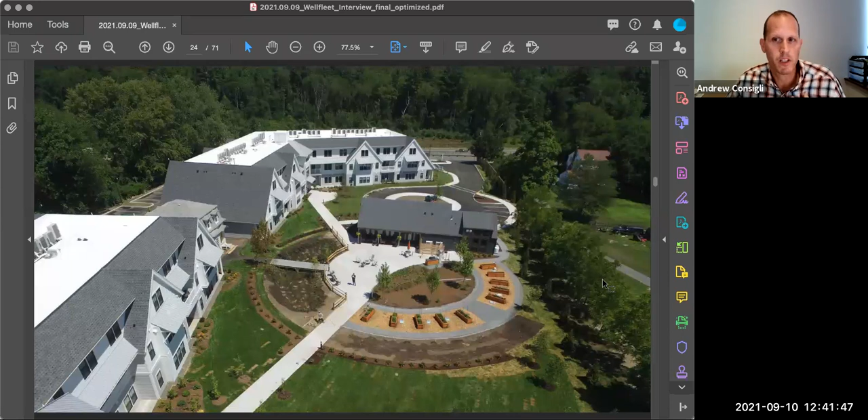The focal point is the community vegetable garden in the center, where residents can garden and socialize outdoors, a community house where they can socialize indoors, and a relocated original farmhouse that was on the property, repurposed and renovated as a garden shed to be used in conjunction with the vegetable gardens.

Other sustainable design techniques include a rain garden that collects all the rainwater for site irrigation, and solar panels that will soon be installed to run all the electric in the buildings.

Our last project, although a different scale and more urban than our previous projects, Ace Flats was just completed this past summer and is now being leased in the town of Reading, Massachusetts. This 4-story project is a mixed income, mixed use, transit-oriented development in a newly created 40R smart growth district.

The project received $1.4 million in DHCD funding in the first round and has been praised by the planning board and other leaders in the town for its contextual design.

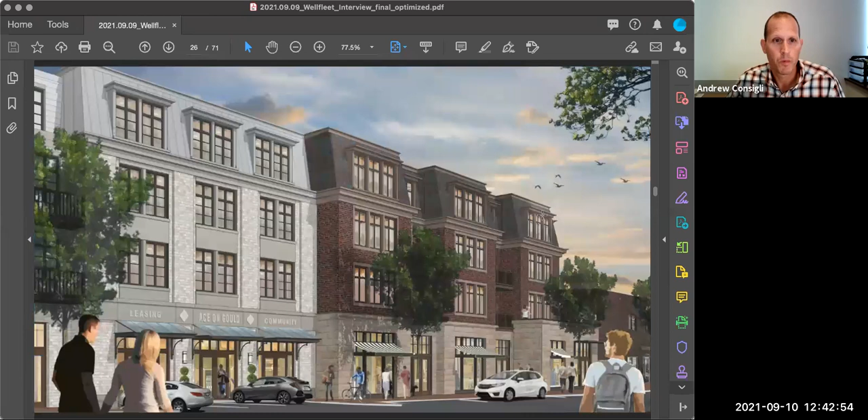This project was a joint venture with Trevorth Companies out of Boston, where both firms worked equally to co-develop Ace Flats. Trevorth Companies and Civico, because of the success of this project, are now working on a LIHTC project that is very similar to Ace Flats in downtown Winchester.

As I hope you can tell from our project experience, we have a broad range of project types, all focused on multifamily housing. There are common threads that weave throughout each project, such as design and site planning principles, sustainability, and collaboration with public, private, and nonprofit partners.

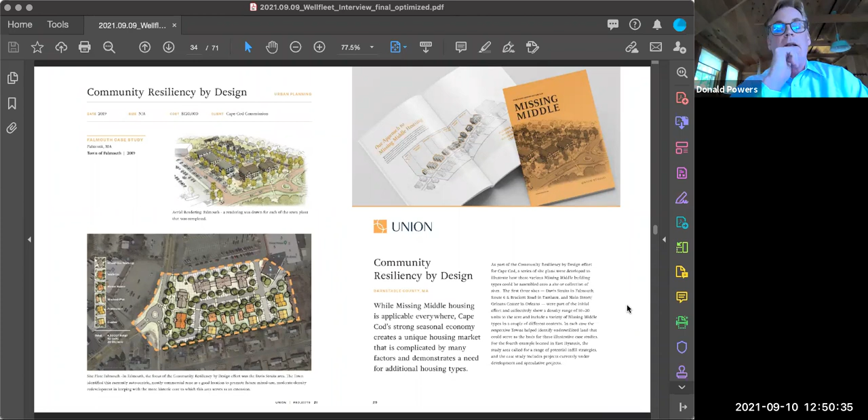For this project, Community Resiliency by Design, the Cape Cod Commission commissioned us to originally look at 3 communities as model communities experiencing growth issues, and to develop strategies to accommodate that growth in a density that was sympathetic. All density is not the same—design is the key factor in whether density is offensive to the community or extends it.

We examined a number of different possibilities. The communities we worked in were Falmouth, Orleans, and Eastham originally, and later we added Hyannis and Sandwich. The primary point is that the Cape Cod Commission believes we're one of the good guys—a mission-based firm focused on solving these community problems since our inception 21 years ago, and we treat it as our civic mission to solve exactly the problem Wellfleet is grappling with right now.

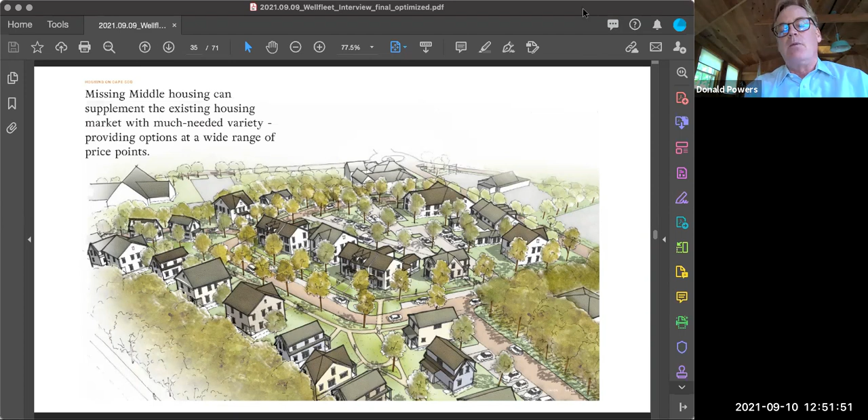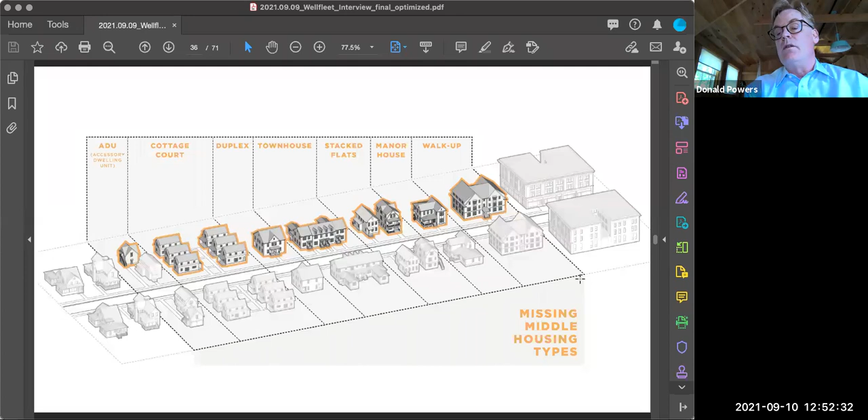Next slide, please. So just to define what missing middle is—it's really the stuff between the left-hand little cottage and the right-hand apartment building. It's all those forms of housing that existed in our communities until about 1940, when they started to be zoned out of existence and torn down and replaced with single-family houses. Not all the forms represented here will be appropriate for Wellfleet, but they represent a menu of options that play well in a mixed environment, with the single-family fabric you have, and in certain communities where larger forms are appropriate as well. Next slide, please.

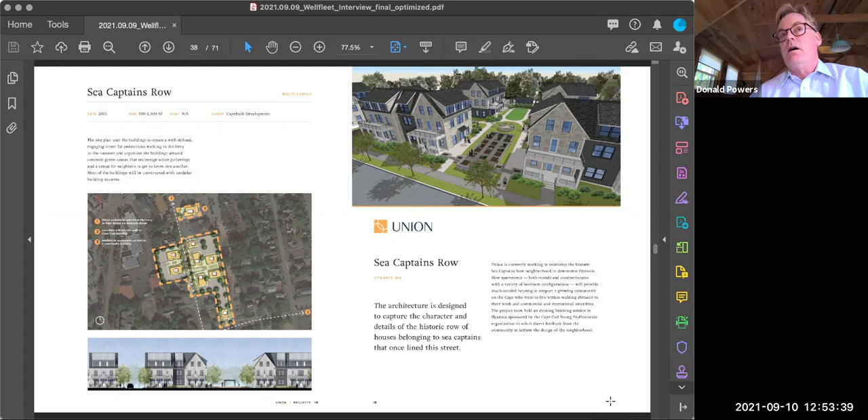At the other end of the spectrum, this is an example we'd relate to our project called the Manor House. These are bigger than what we're proposing at Wellfleet, but it's another example where you can take a multifamily structure and render it in pieces sympathetic to, or derived from, the scale of a single family neighborhood. This is currently under construction in Hyannis right now.

The summary of this series of slides is that this has been 21 years of honing our skill in how you make an appropriate scale for a neighborhood. That neighborhood is always different - it's never the same type or combination of types. For instance, this one in Brewster, Mass was a single family neighborhood with no mix of types, but again the scale and density create something, if not altogether traditional, certainly pleasing and recognizable to someone who understands those kinds of neighborhoods.

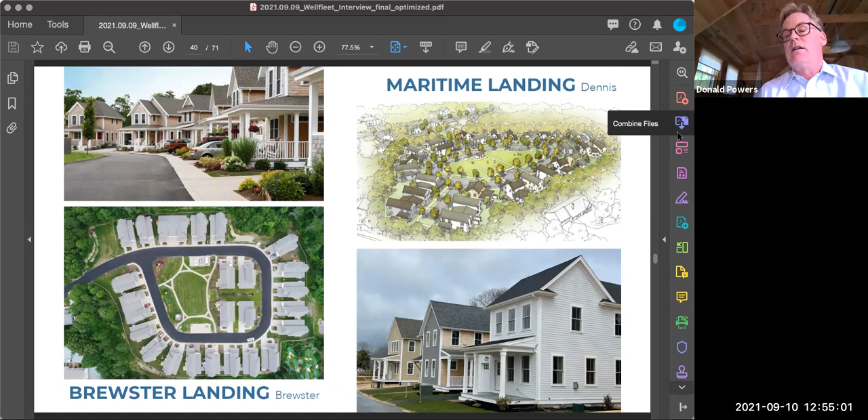So just to reiterate, this has been our passion. We really don't make the distinction between affordable housing and market rate housing - it's all the same design problem. How do you fit into a neighborhood, and how do you do that in a way that extends the fabric of the neighborhood rather than creating a rupture?

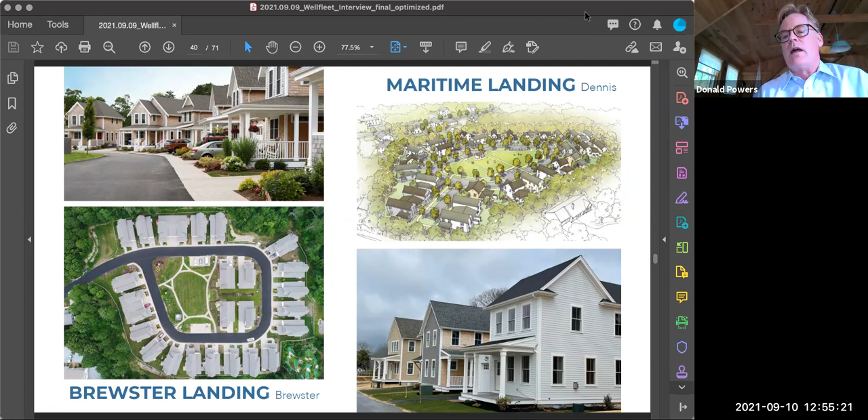So with that, I'll pitch it back to Taylor, who's now going to hand it over to Jeremy Lake, a senior associate in our firm, who's going to talk specifically about our proposal and how these principles of site design and the missing middle find their way into our proposal.

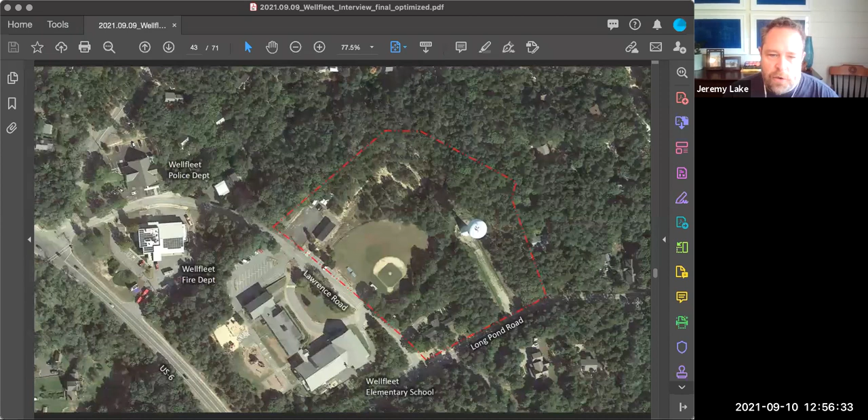We think that's a more sympathetic way of addressing the need here at 95 Lawrence, whereas you can see there's a lot of single family at lower density in the surrounding context. This is the existing site that you're well aware of. Go ahead to the next one, Taylor.

What we did was a series of analytical diagrams to walk you through our thought process, what we were thinking about and seeing as we came up with the proposed site plan. First and foremost, the existing ball field - we had some initial conversations on our team about whether it would make more sense to shift the ball field one way or the other, so the community could be more consolidated on half the site, with the baseball field on the other.

But in addition to the cost associated with that, the more we talked about it, we realized the baseball field is actually kind of a really cool potential focal feature for the entire community, and it made a lot of sense in terms of its relation to the elementary school across the street, which is the primary user of it. So in the end, we decided it makes a lot of sense to actually keep the existing ball field where it is.

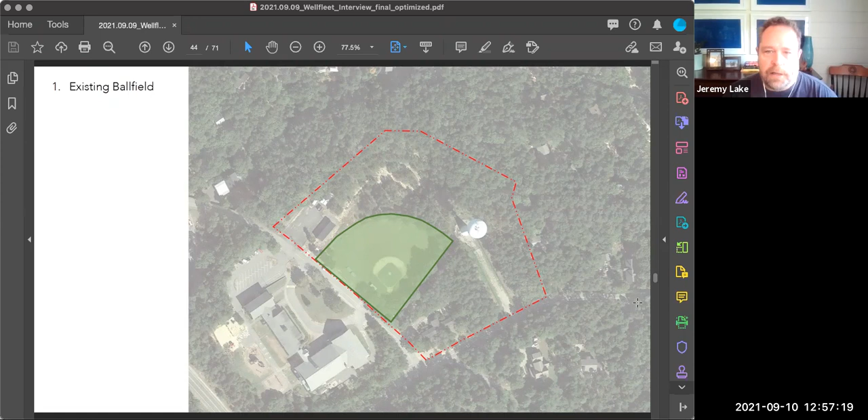We also realized it provided an opportunity, and I know Bohler had done a number of studies about this with the town, but just thinking about how we might approach the wastewater treatment need, both for this site and the adjacent structures that are part of this discussion. Certainly, utilizing the outfield of the ball field as part of the leaching field area for the wastewater treatment site made a lot of sense.

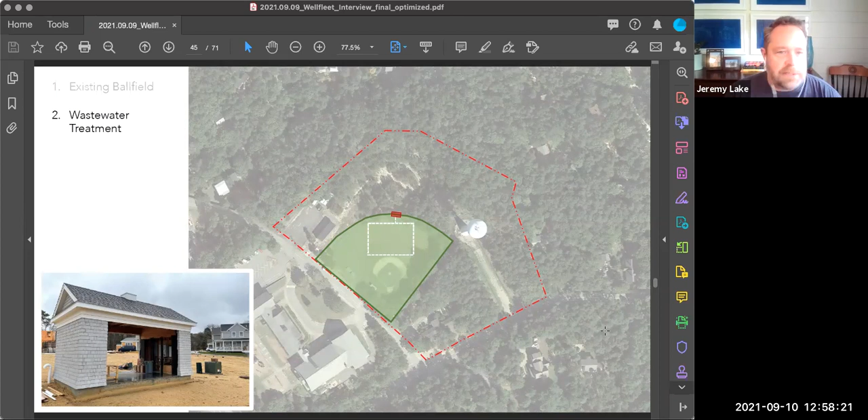We also started thinking through a little bit what we might do with some of the more utilitarian needs. Where do the pumps and the things go, in some sort of structure? In the lower left hand, we're showing an image of a structure we've included at Maritime Landing in Dennis, where half of that building houses some of the required mechanical equipment. But we've also combined it with our mail kiosks. So the idea was that through sort of thoughtful and intentional design, even utilitarian needs can help in terms of placemaking and character building, and we were able to make a sort of communal amenity out of something that's somewhat utilitarian. We'd like to try to do something similar here. Obviously, a lot of details to be worked out as to whether or not that's the most feasible approach, but conceptually, that's what we'd like to try doing.

Certainly, the existing water tank needed to be addressed. That's not going anywhere. And affiliated with that is the easement that delivers the water to and from that tank, which obviously needs to stay in place as well. So those were sort of the fixed items in the site.

So when we were thinking about the site access, we appreciated that it made the most sense to imagine coming and going primarily from Lawrence Road, trying to avoid Long Pond Road there along the south, because that ties in primarily to the single family community. So what we wanted to create was this internal loop that basically circles around the field and through that easement and back down again to Lawrence Road, just to provide a multitude of ways in and out of the community. That's also really great for emergency access and other access needs for a wider range of users, including access to the water tank.

One of the conversations we had with folks on the site during the site visit was whether or not the existing drive up to the water tank was sacred. Was that something that needed to be kept and respected? Was there a lot of infrastructure embedded in there? And the answer we got in the field was that no, as long as their service vehicles could drive right up to the water tank and do what they need to do, it didn't necessarily have to be along that route. So one of the things we were proposing was thinking of our own internal site access also as access to the water tank, also emergency access, trash—all those things utilize those spaces.

We also wanted to include a central green space that was about midway around that loop, and recognized that was also a good way of accommodating and incorporating the water tank. So we included a central green space at that location, and also included basically a little secondary loop that would go out and around that central green space, tying back to our main access loop.

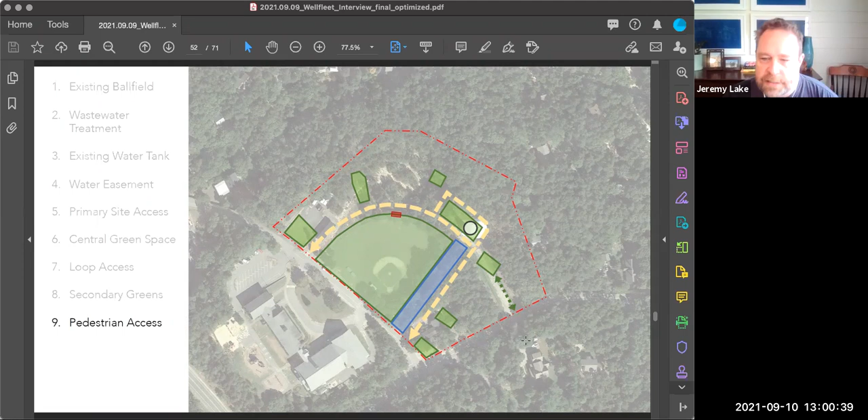Down in the lower right-hand corner where we already have the drive for the water tank service, we thought it would be nice to include pedestrian access out that way, so residents wanting to take advantage of a walk or a run along Long Pond Road could still get out there, since that clearing already exists through the trees.

The primary feature of our design is this notion of distributing the buildings. We've been building up to that with everything we've talked about so far, thinking of this as a village, a neighborhood, not a single large format structure, because we think that is the most appropriate way of accommodating a lot of density on site, in forms that should be sympathetic and recognizable to the existing single family context.

Associated with that is also distributed parking. Instead of needing one or two large consolidated lots, the parking for the individual units can be distributed with the units themselves. Most of that parking can actually be accommodated on the primary site access and the secondary loop. We only needed one small consolidated parking spot, top middle, where we had a few buildings back off of that primary loop, so we can accommodate the required parking in a way that feels broken up so it doesn't overwhelm.

And last but not least, by trying to keep the development as far west as we could, we tried to provide as much of a buffer as possible along Long Pond Road, recognizing those are primarily single family homes along Long Pond, wanting to address that to the degree we could along that edge.

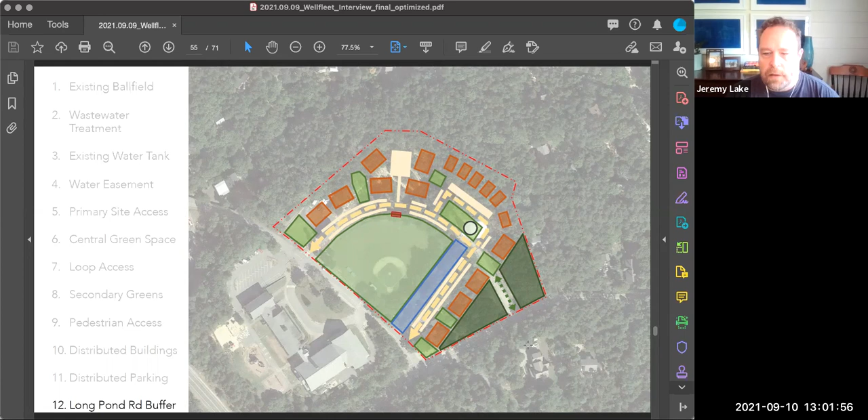So this is the resulting proposal when you take all those things into consideration. You can see the drive as it works its way out and around the ball field. That's a 20-foot wide two-way lane that also should serve fire access needs and all the other access needs.

You can see the idea is that the homes are arrayed along that loop road. We think it's actually kind of cool thinking about residents being able to look out and see a little league baseball game going on, with units out beyond the outfield wall, reinforcing the form of the field. So really thinking of that as a communal asset, strengthening the ties between this neighborhood and the broader community.

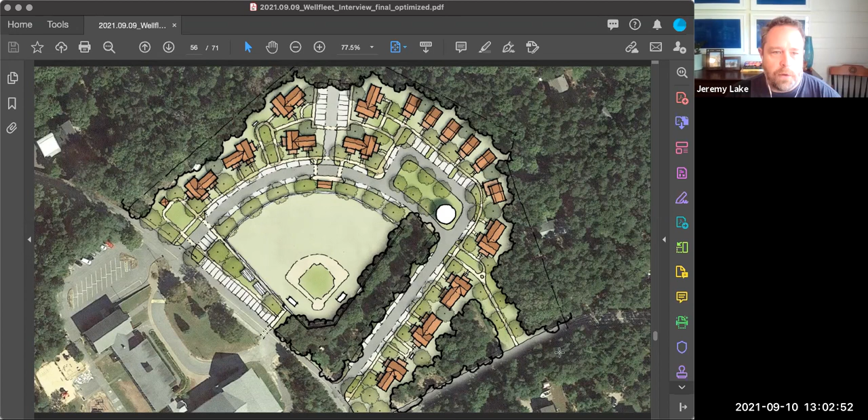This also shows the distributed green spaces. One thing we didn't highlight in the diagram is that there are walks, sidewalks, and trails that connect all of these things together, so residents have ample ways of getting around and connecting out to the broader community and to one another within the community. With that, I'll pass it back to Don to talk you through the units themselves.

Thanks, Jeremy. The first thing I would say, and it's a fairly obvious point, is that we would take our inspiration from the architecture of Wellfleet and the Greater Cape and Islands. There's a very strong established tradition of shingled cottages in the Outer Cape and the islands, and we're looking at those for clues on how to organize the buildings, how to organize the site, how to define edges, and what scale is appropriate. These were some of our inspiration images, and each of the items, the roses, the fences, the ribbon walks, and the massing of the buildings will show up in our proposed architecture.

Next slide, please. So for our architecture, Jeremy pointed out that the manor houses, each of which essentially has a footprint no larger than a single family house. But even beyond that, we've taken the strategy of dividing that form into a series of what we're calling connected cottages.

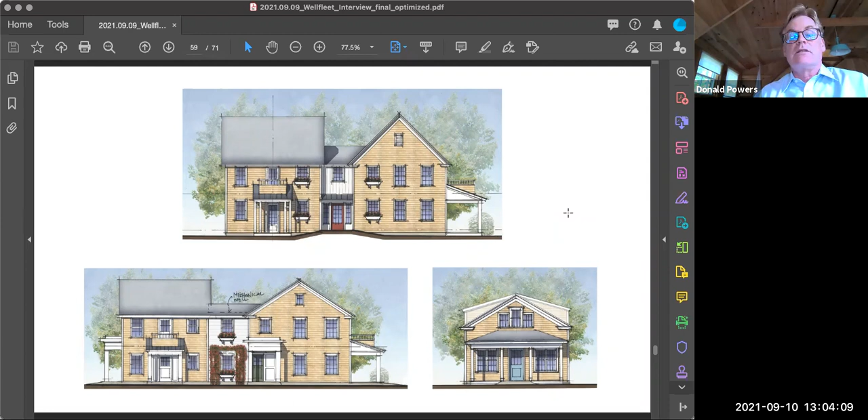Next slide, please. So you can see this overall form is about 50 feet by 25 feet, which is the size of a normal single family house. But next slide please, in fact that's composed of things which are much more the scale of a 19th century Cape cottage, which would mean each block is something more like 24 by 24, and then there's a hyphen where that needs to be connected.

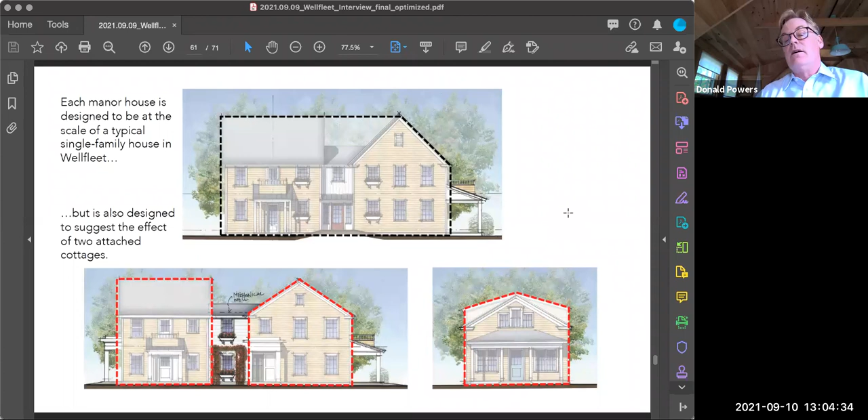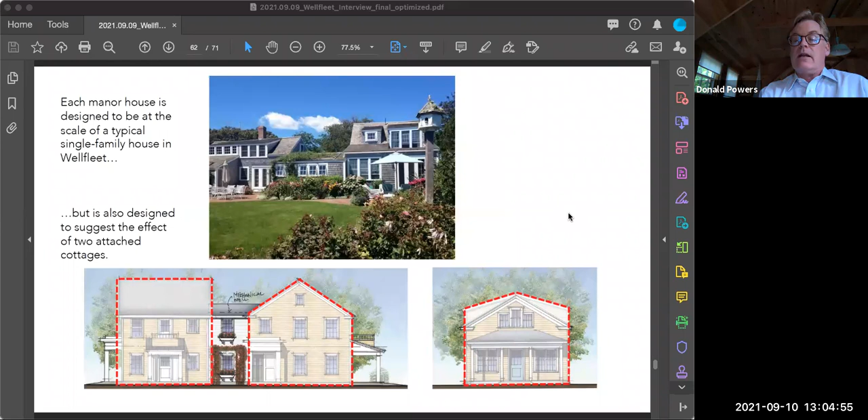So what you're looking at are the four-unit buildings, the strategy of taking this four-unit building where there are two flats on the right and two flats on the left, connected by this hyphen. You can see the direct lineage coming off of the precedents that we're looking at. It's a way of reducing that scale, taking a four-unit building and making it the scale of a single unit building, then taking a single unit building and making that the scale of two connected cottages.

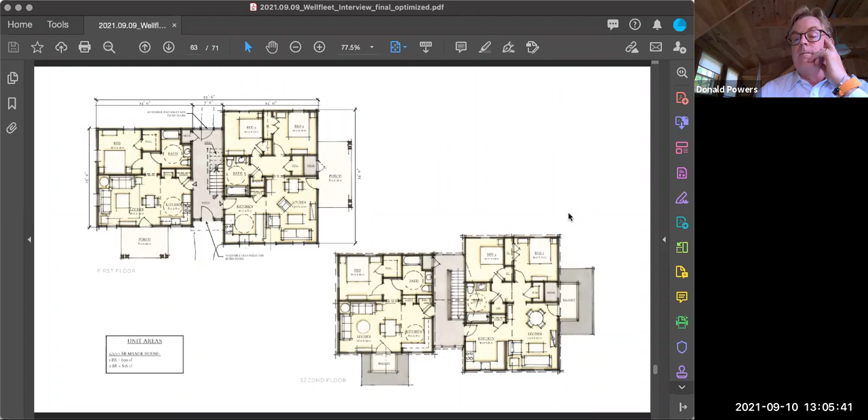There were comments in the questions about the size of the units. One thing we took as our guideline, without being absolutely certain of all the criteria to which we would be held, we designed to the DHCD design guidelines for unit size, which are very clear in terms of the maximum size for units and what features need to be included. We did that as our most conservative approach. Certainly as the project develops, there might be opportunities to develop slightly larger units with more storage or other amenities that collectively as a team we all agree are needed, but in this case we've hewn pretty closely to the DHCD design guidelines.

Next slide, please. The set of materials is ubiquitous to the Cape: white cedar shingles, white trim, divided light windows, and board and batten occasionally. Next slide, please.

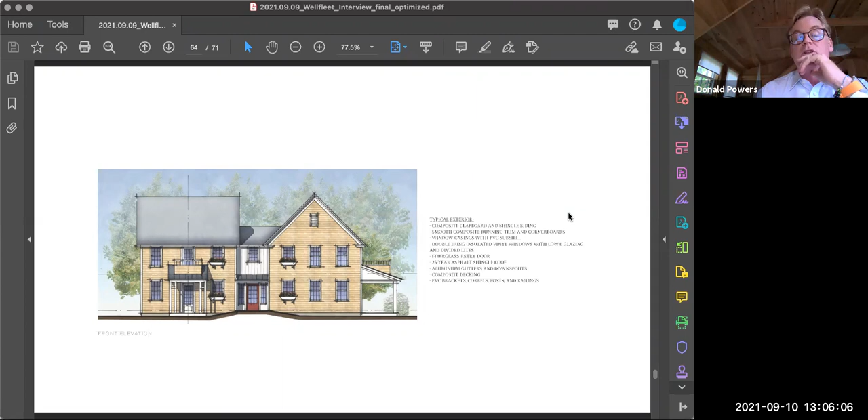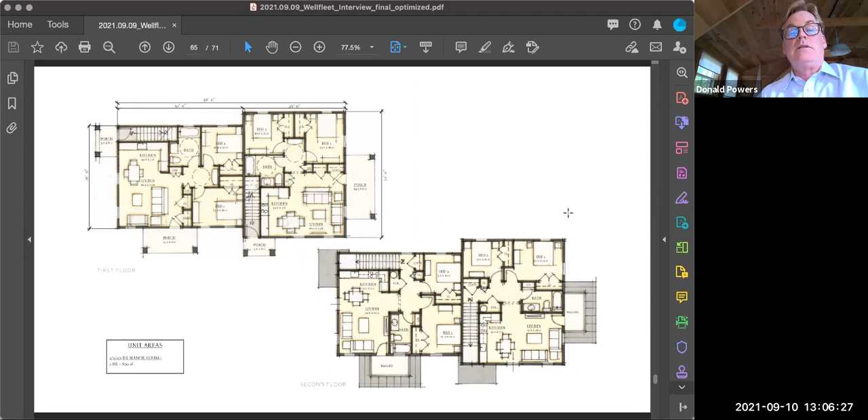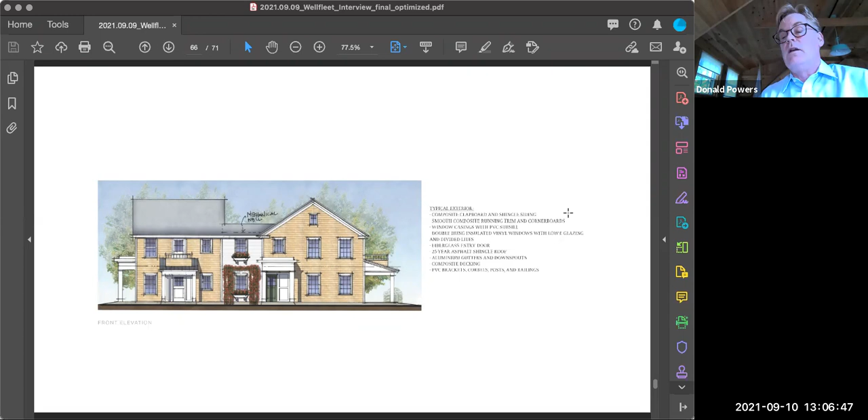This is an example of a different type that omits the common stair in the center and opts instead for each pair of flats having a stair that accesses the second floor unit. Next slide, please. Again, it's the same strategy of connecting that with a lower hyphen that makes it read as two buildings. Note also that each entry is expressed to each unit. This is another way of breaking down the scale into smaller pieces, with porches, overlooks, and individual entries to give each unit a kind of primary entrance without having to come into a common lobby.

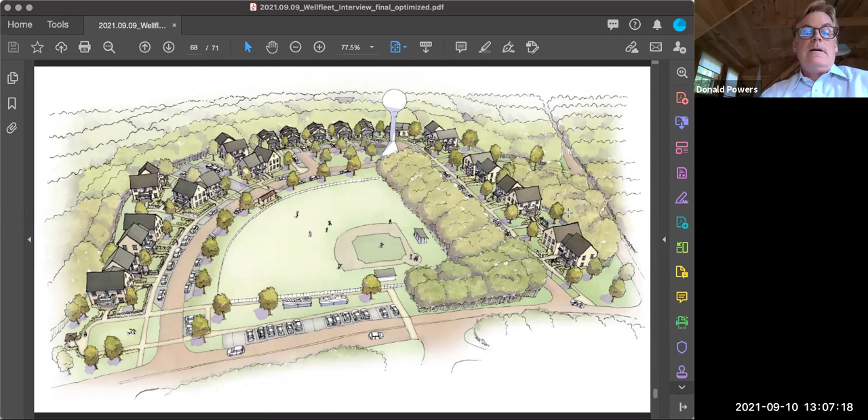One additional point I wanted to make is that it's not just the architecture, but also the additional landscape elements. If you look closely in this rendering, it's sketchy, but we would propose that each of the lots be lined with picket fences and plantings that further reduce the scale and separate what we call the semi-public realm in front of the house from the public realm of the sidewalks. We think this is going to generate a scale and a street presence that feels very familiar to what people expect of Wellfleet. Thank you.

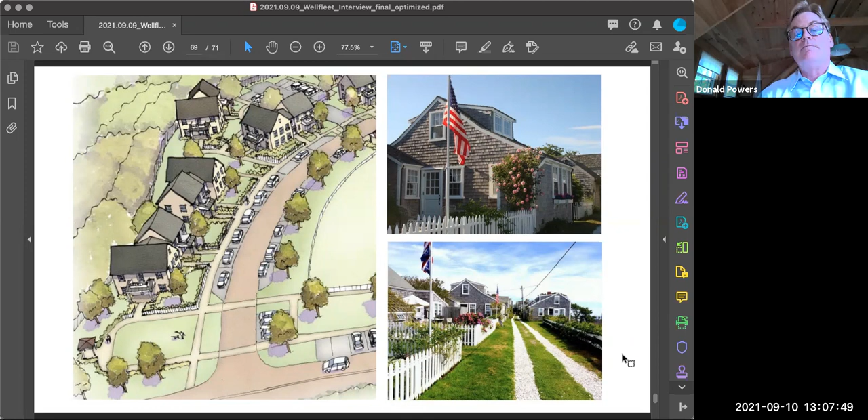So I'd like to wrap this up with a couple final points, rehashing the key themes in our proposal. First, the other two respondents to the RFP are incredible operators. Between POA and TCB, I think they probably own or manage about 20,000 units across 11 states. We're obviously not that. We own 250 units, which we manage with multiple management companies, and we have another 250 or 300 units in the development pipeline. We have one office here in the Commonwealth, and we work here in the Commonwealth. We're a young company with, in my opinion, an impressive track record that we've developed over the past 6 years, and we see the Cape as an opportunity to build on that story through contextual design and thoughtful development.

And we partnered with Union for exactly this reason - they're like-minded in their desire to create what we see here as a neighborhood. So just to rehash, I think our proposal has articulated that there's an opportunity to develop a diversity of housing choices here. There are a number of funding tools available, and one of those allows us to create workforce housing. The design is very contextual, and our approach takes into account holistic sustainability - meaning more than just the features of green building, but the design and appropriateness and how a place will belong over time. And really the last two pieces are together but separate: we feel we've brought together a team that really helps us understand the local context, and we hope to continue that and develop an opportunity to have a dialogue with the town of Wellfleet to figure out, using this project proposal as a starting point, where we can take this such that it meets the needs of the town and the affordability goals in the context of the team that we have here before you. Thank you.